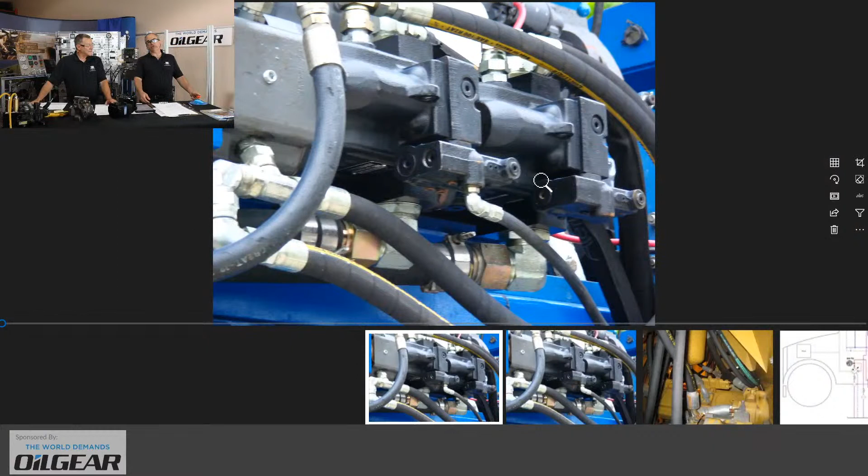As we usually do, as we're getting underway, we have a look at some photographs of common load sense machines, just so we can remind ourselves of what it looks like out there in the real world. So I'm just going to switch over to my photos here. And these are photos that Mark and I have collected over the years in our travels, just to sort of remind you a little bit of what load sense machinery might look like in a typical final build or installation.

And what you see there in the middle of the screen, if my cursor allows me to sort of follow along on a hose, hopefully you see that. You'll see that LS signal line coming back from some kind of flow proportioning valve, entering back in and connecting up with the pump controller on one of two pumps. The more outboard pump of two through-mounted pumps only has pressure compensated feature. But the one that's more closely coupled to the prime mover, that one has the load sense line coming in.

Let's switch over to our next one. Here's from a Caterpillar grader. You might recognize this one - it's one of two main piston pumps on this particular machine.

And there it is again, that load sense line. You can see it here just above the yellow controller on the pump. That load sense line is coming back from the main valve bank, taking information from the most heavily loaded cylinder or hydraulic motor on the machine and using that signal pressure to basically adjust the pump on the fly. It's really not too much more complicated than that. A load sense system, by some description, is still a pressure compensated pump, but it's constantly being readjusted based on how hard the work is at the hydraulic cylinder or the motor.

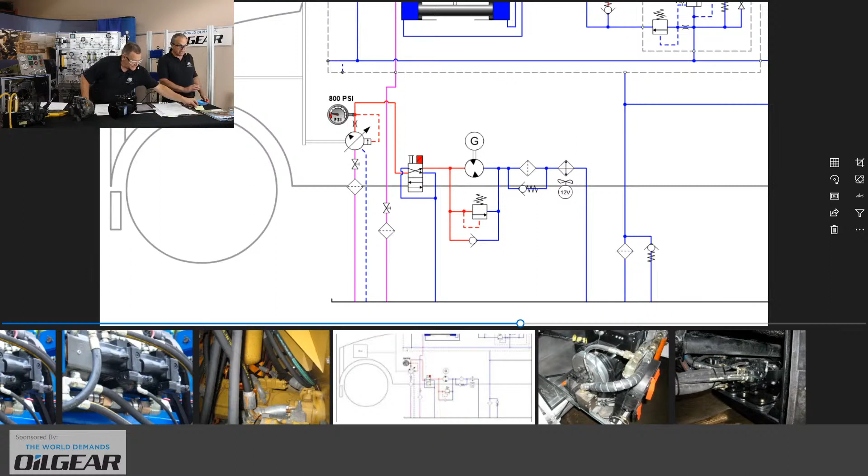In fact, in terms of keeping it simple, let's have a look at a super simple hydraulic system. This is the load sense hydraulic system for a generator set. Can you believe it? This particular pump that you see there just below the pressure gauge is a variable displacement pump, and it is sending flow through a 4-port 2-position hydraulic valve and off to a hydraulic motor that you see there just below the letter G. What's happening? Well, this hydraulic motor is powering a generator set.

And so one of the big advantages for working with a load sense system is not just about the energy savings - that's a big one. But another thing that a load sense system can do is very carefully regulate flow in the face of changing load pressures on that actuator. And so as that hydraulic motor is turning an electrical generator, it's coming under different amounts of load depending on what's been plugged into that generator.

And so here's a simple load sense system. And if you're looking at this schematic and wondering where's the load sense technology, well, it's all clustered near that pressure gauge. So as much as many load sense systems that you might be familiar with have a multi-section valve bank, like on a grader or an excavator, let's say, in this case, look just above the 12 o'clock outlet port position on that pump and notice that there's an orifice there.

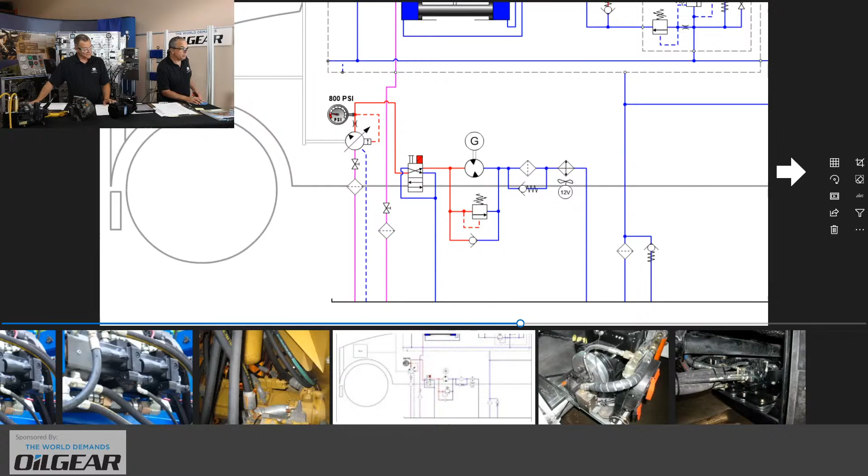It's all fairly compact. So let's see it on the actual machine. There we go. That's the generator, that aluminum disc, and the black structure that moves off into the upper right-hand corner of the screen. And then, for those of you who know your bent axis piston motors, there it is. It's turning that particular generator.

There's a bypass pressure relief valve there. There's an anti-cavitation check valve built into that beige colored valve block that's on the inlet of that motor.

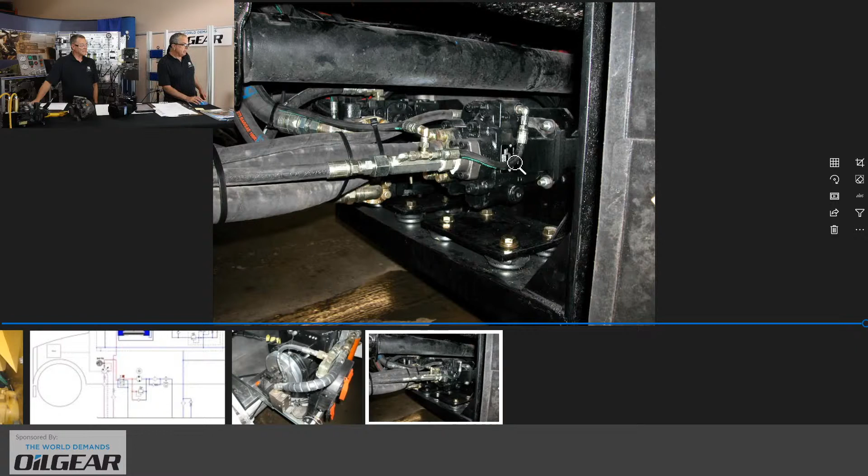But as we move back towards the pump for this system, the load sense capable piston pump, what you are seeing there, it's all kind of painted black, so it might be a little difficult to see some aspects of it, but flow is moving from the pump on the right out through that fixed orifice, not even a variable needle valve, just through a fixed orifice to set the flow rate and create that necessary pressure drop. Mark's going to have more to say about that.

And after passing through that fixed orifice, there's our load sense line. It's not even a foot long. It's not even 30 centimeters long. And back to the controller on the pump.

I think in our travels, Mark, this is probably the simplest plumbing we've seen. I haven't seen one simpler than that. For a load sense system, yeah.

And if you're wondering what that T-fitting is, where's that going? That's just going to that gauge that you saw on the schematic a moment ago. That's going up to a gauge on the operator's console. Here, I'll back up. So that gauge that you see the 800 pressure value for, it looks like it's just connected directly to that T-fitting, but it's actually on a hose that goes up to the operator's console.

So that is our brief look at load sense systems out there in the real world, just to remind us a little bit of what the applications actually look like.

Carl, also go back to the schematic for a second. Okay, let's do just to show a good example of the simplicity of this particular symbol.

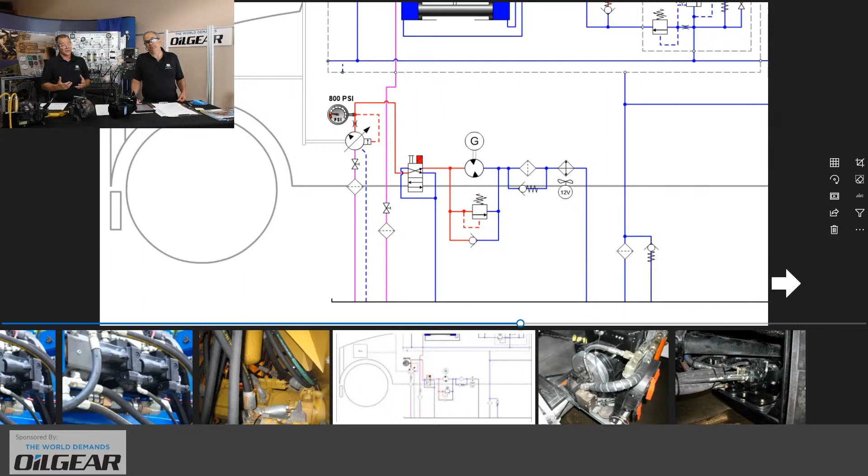Yeah, that's a good point to make, Mark, that pump symbol is overly simplified. We're going to get into a little more complex ones. The pump symbols are going to show up here in a moment as we get into our material, and we'll see that there's generally a few more elements involved with the drafting of that symbol if it's complete, as Mark has pointed out.

All right, let's switch over to lunchbox sessions, and let's dive into a simulation that will help us understand a bit more of the realities of how a load sense system is working. I hope that's showing up correctly for everybody's screen there. And this is one of our simulations where we've got a piston pump being featured in the middle. Maybe we'll zoom in as we move along here a little bit.

And then flow passes over to the right through a proportional valve spool. The assumption with the vast majority of load sense operated or load sense controlled hydraulic systems is that you're likely to change the speeds as you desire to hydraulic cylinders or motors. And in this case, instead of that fixed orifice, because the genset motor only needed to turn at one speed, that's been replaced with a fairly complex looking proportional valve spool.

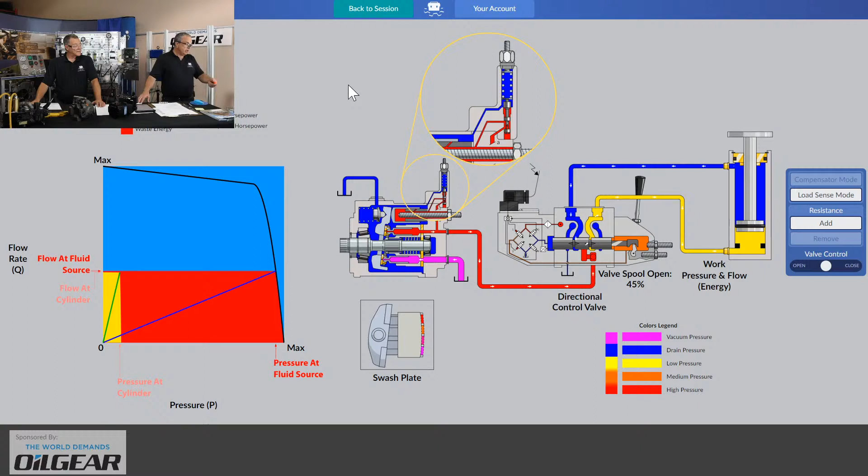And what you'll notice is that we don't yet have a load sense system. There is no feedback line present yet. We're basically working with just a pressure compensated pump at this moment.

Now on the graph over on the left, you'll see a couple of colors there. That yellow color area represents the pressure that's happening on the business end of this hydraulic system right now, and that's out at the cylinder. So our cylinder only needs a minimal amount of pressure right now to move. The cylinder is lightly loaded. That pressure value you'll see along the horizontal axis on the bottom where it says pressure at cylinder.

And the flow rate is also well below the maximum. The flow rate is somewhere below 50% of the flow. Well, if you have a look at that proportional valve spool, you'll see that it's set to 45% opening. So the valve spool is not even quite half open, and that's because the operator wants to control the speed of the cylinder.

So the amount of horsepower, the amount of total energy required to move that cylinder is that diagonal green line that looks at both the flow rate and the pressure. And so our horsepower line, the length of that green line, that diagonal, is representative of how much power it takes to operate the cylinder right now.

But what about the entire hydraulic system? The entire hydraulic system starts back at the prime mover and the pump. Well, that is the long, dark blue hypotenuse or diagonal line that you'll see there cutting across the screen. And that's letting us know what's happening at the fluid source, the piston pump.

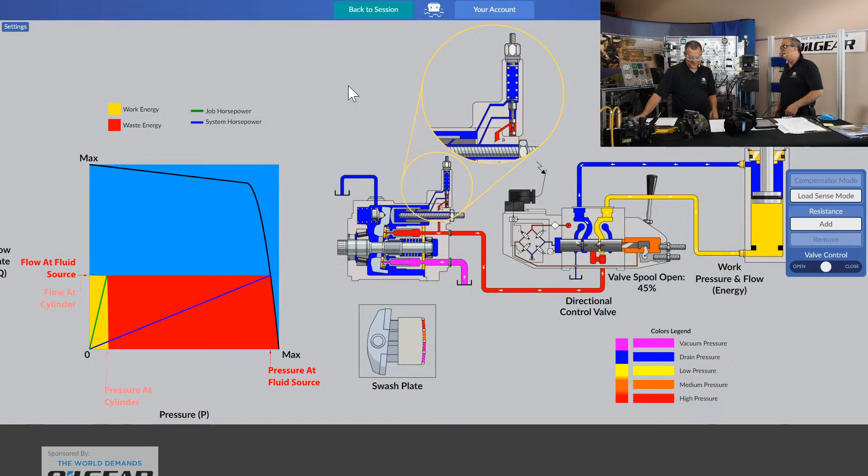And if you decide not to use all of its flow for the cylinder, then it's also at maximum pressure going where? Right over the relief valve. Going over that relief valve, and there's your heat.

So the pressure compensated pump is already an improvement, but we can do better. I'm going to click on the button for change to load sense mode. Have a look at what happens to the plumbing near the valve bank. As I click that button, you'll see an extra hose is going to show up. It's a small one. There it comes.

A small diameter yellow hose has been inserted between the valve and the pump controller. And that's our load sense signal hose, LS signal. And so that is information that is being fed from the work the cylinder is doing right back to the pump to help make the adjustment at the compensator on the fly.

We spoke about that. Now, it might be most convenient to take the load sense signal right from where the load is being carried. That's at the base of that cylinder. That's not convenient for plumbing. Not really. No. So it's typically done with a shuttle valve that is sitting there between the A and the B work port inside your typical load sense valve bank. Not an uncommon way to arrange that.

So in simple terms, what's happening here as we look at the energy graph back over on the left, what we see is that our pressure now is no longer at maximum. Like the pressure compensated pump, this pump is flow matching our requirements with a proportional valve that's only part way open, but also setting the maximum pressure on the fly in hopes of trimming back the total amount of power that this system needs when the cylinder is lightly loaded.

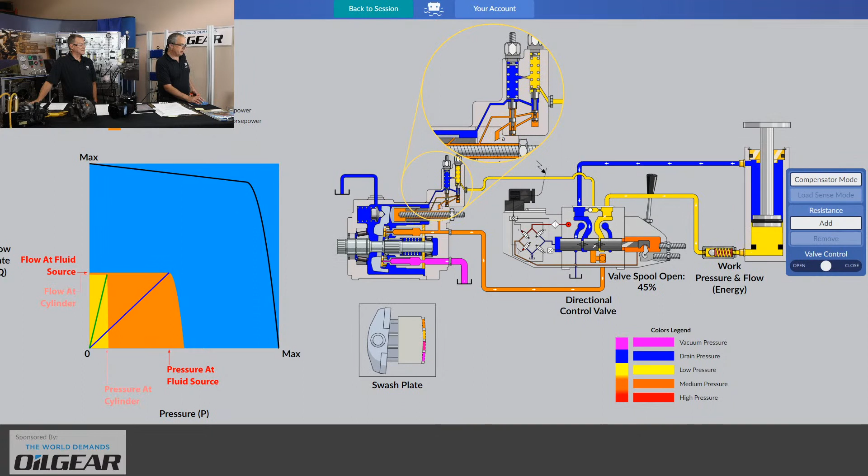What happens if the cylinder needs to work harder? I'm going to add a brick now. Just going to find my mouse icon here. And I'm going to add one brick. So one brick added to the cylinder, and our business end of the hydraulic system will be working harder.

Well, that means a higher load pressure will also be transmitted to the pump through the LS signal line and will give a boost to a spring that is usually set pretty light.

So that spring is lightly set, but it takes a booster value from the load sense signal line coming back from the loaded cylinder via that shuttle valve that's commonly located in a load sense valve bank.

So I hope that gives you a little bit of a picture. We could spend more time there. That gets pretty technical, but at least it gives you an idea of the energy savings that are possible, because the idea is not to have the entire system consuming far more energy than what is needed to work with the hydraulic cylinder or motor at any one time.

Oh yes, I should probably point out that the difference between the pressure at the cylinder and the pressure leaving our pump, the fluid source, is more commonly referred to as the margin pressure or the differential. Maybe we have ours set a little bit wider than 300 on this graph. Hard to say. It's just a relative graph.

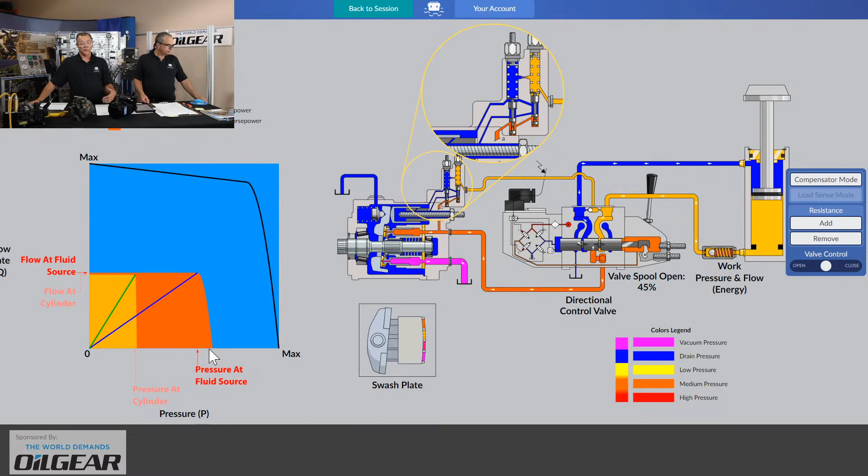You can't hurt it, I often tell people. But when I'm initially teaching load sense to a group who's just entering into the field, I just tell them to focus around the amount of energy that's being used. That's our key thing right now.

Thank you, Mark. We'll show that.

Absolutely. As Mark mentioned earlier, the symbol on a schematic drawing for a load sense pump is usually quite a bit more complex than the one you saw on the genset hydraulic system. And here on the screen, you're seeing a cutaway of a load sense pump with its two controllers. The one in blue up in that magnifying glass, that would be our pressure compensator, our pressure cutoff, and the one on the right, the load sensing, sometimes referred to as a flow compensator.

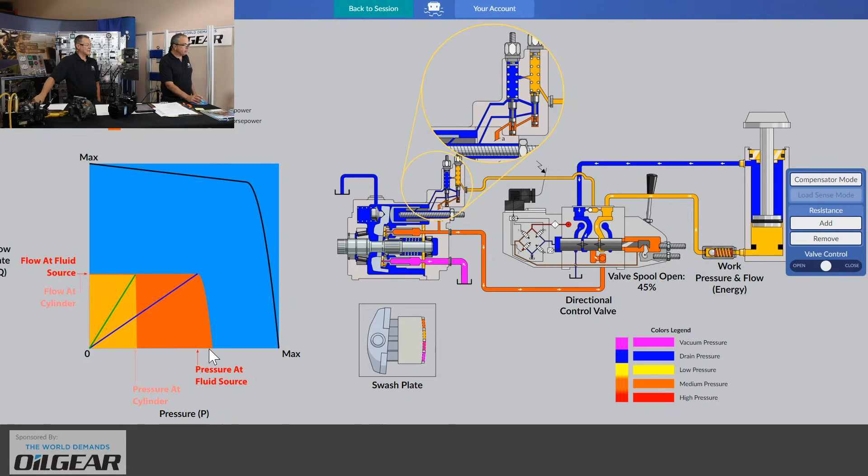Now we're going to switch over and look at a very typical schematic symbol for a load sensing pump. That symbol can look intimidating on a schematic diagram, but what you're seeing is just a depiction of a pump with two pressure controls built in. We're assuming you already know about piston pumps and the control piston and the bias piston, and how that works for changing the swash plate angle.

There's the pressure compensator, set at 1500 psi. We have a load sense setting, which right now is at 150. I'm just going to move it all the way to 300.

Looking at the symbol for the needle valve on the outlet of the pump, that doesn't come with the pump, but a lot of pump manufacturers will remind you that you're going to have to choose some kind of flow proportioning device to create that pressure differential. That's so important, you have to choose that. We've got a simple needle valve here, but on our live schematic it says it's usually a proportional directional control valve that would be sitting there.

If you look at the two pressure gauges and the numbers there, the pump outlet gauge is the lower of the two, and then the system gauge. We don't know what's happening out the top of this schematic, up on the system with cylinders, hydraulic motors, things that are doing work. But what we do see is that across our needle valve, the differential is being maintained at 300. There are little fluctuations on the gauges, but that differential is maintained using the feedback information on that horizontal yellow line you see there.

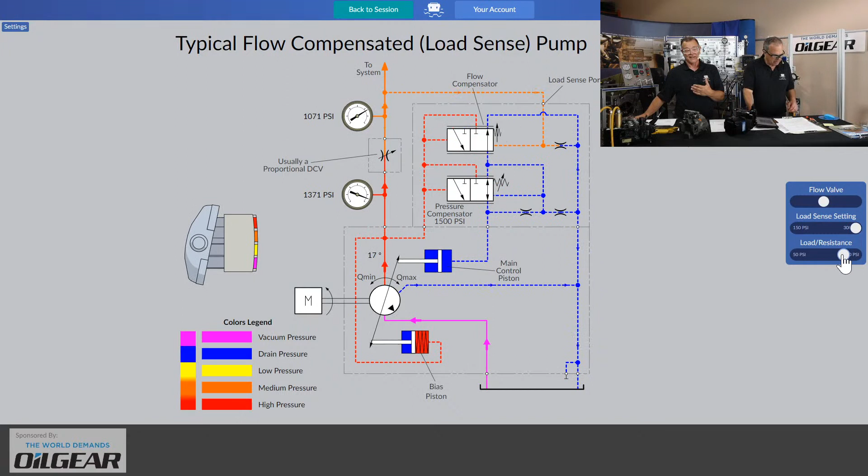Going back to one of the things I've found over the years of training people, it's to keep it as simple as you possibly can, which works really well in my world. Carl, on the other hand, gets into the complexity, so I just tag along and learn from him. But on this one, we learn together.

What we've always said about load sense is it's very similar to cruise control on your car. If you think about it simplistically, you just want to set a speed and go along. If you hit a hill, your engine will get more fuel, more power. But if you're coming down the hill, it'll back off and return to a standard setting. So keep that in mind, no matter how complex the system gets - we're sensing the load.

Really just sensing a load and telling the pump what to do.

We're going to show that as we move along here. We'll bump into some terminology like standby pressure, differential pressure, margin pressure, and hopefully we don't tangle that up for you. We're going to try to keep that as simple as we possibly can. We'll also answer some questions in a few moments that you guys have been sending in, so keep firing those in and we'll get that all queued up.

Maybe just before we get to that first round of questions, let's have a look at one more simulation here. Maybe that's a little simpler. We've gotten away from some of those great complexities of the hydraulic system and gone back to just showing a basic needle valve, in cutaway form, not quite so many symbols here.

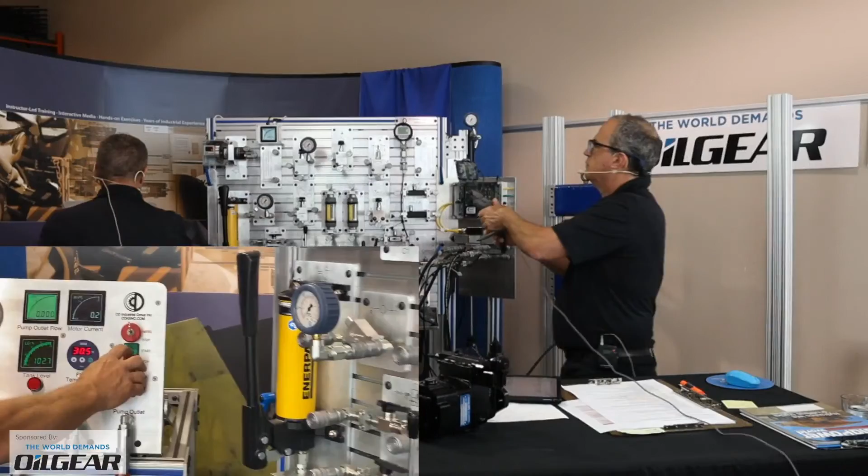So what I'm going to do is start up here. We've got this set up, I've got my pump set up. One of the first things I tell people: always set your flow first. Flow rates can change pressure readings, so it's a good idea to just get your flow rate set up. So I'm going to start this system, and you'll see I have this left in an open position, or closed.

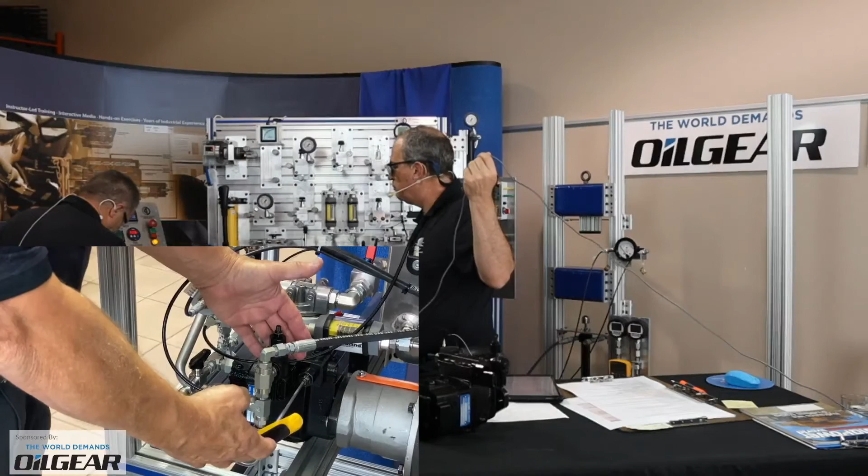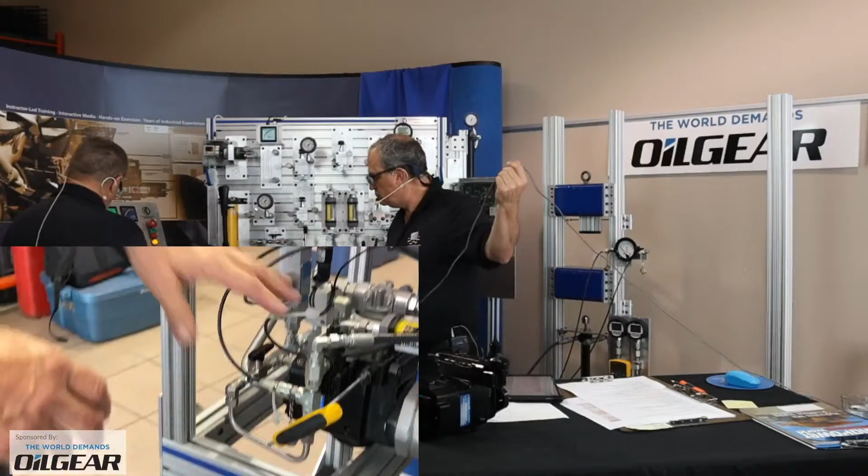This pump has a maximum volume stop control, controlled by this Allen wrench at this end on this particular Oilgear pump. Very common to see. That allows me to adjust the angle of my swash plate. I'm not going to play with that today. You can see I've got it set, and of course oil temperature and digital readouts can get kind of finicky. As we teach with analog gauges, people aren't as fussy. You give them a digital gauge, and they'll spend all day trying to make that hit 1 gallon a minute.

As you can see, there are some fluctuations. So we've got our volume set for 1 gallon. Now we've got to set our maximum pressure compensator. Our maximum pressure compensator is the system pressure that has to happen at maximum capacity the system is capable of producing. To do that, I must set this pump in a blocked position. I need to block the flow to create the resistance that I want to set.

So in doing that, my replication of the schematic, here's my needle valve referred to in this drawing as NV2. I'm going to reach in here and adjust this down to create resistance. Let me try, Carl, I'll go on this side. You can watch the pressure going up and up and up. At this point I'm going to see a maximum system pressure. I have preset this before we started today at 1200.

So I've got my 1 gallon, I know my pump can do 1 gallon, I know it can do 1200 PSI. So I'm going to back this off, get the pump into a wide open flow condition again, and shut it off. Now the reason I'm shutting it off is because I have not connected my load sense line yet. This was with my load sense line disconnected.

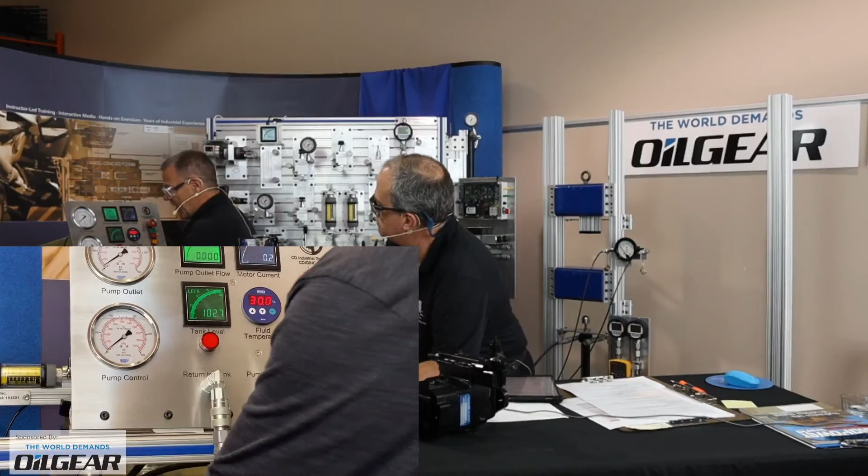So I have to change that situation, hook up my load sense line, which is the hose that we're showing today is going to have the orange cable on it, as opposed to the red, which is always going to be our maximum pressure line.

So I have a situation here. I already know my pump's set for 1 gallon, and I know my compensator is set for 1200. To set this last setting, when we start this up, notice where the pressure is, and I'm going to close off that particular flow control, the NV2, deadhead it, and now I see I've got a pressure up here.

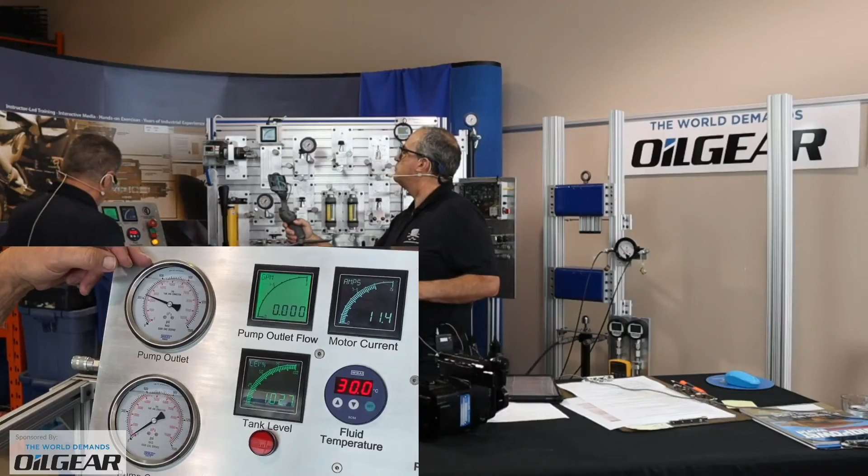On the system pressure now it's maximum, where before it was 1200, now we're down over 300. So I'm going to adjust this on the pump itself. Now this particular pump, you have to learn which are your controls, what makes things change, best to do ahead of time than to just guess at it.

If I were to screw this in, you can see my pressure is going up. Consequently, if I screwed this all the way in, it would go right up to the 1200, but that's not what we want to do. We might as well just put a pressure comp pump on this.

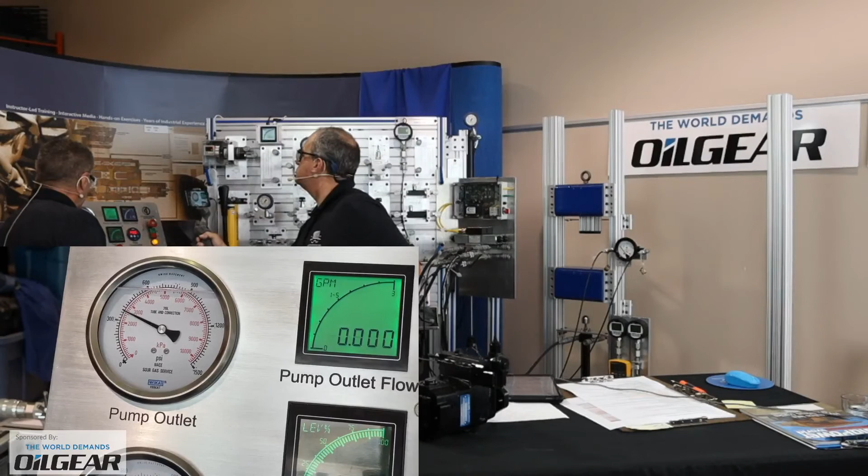So I'm going to back it down till I get near that 300, right, which is going to be close. Now, this is where it's going to be kind of crazy, and we're trying to keep it simple, so we're not going to get too detailed here about where we're picking up the signal from. I'm just saying that's where you make your adjustment.

There's my margin set. So my standby pressure, as we like to call it, is now set. No matter what happens, if I block this flow, I can only ever get the margin pressure setting.

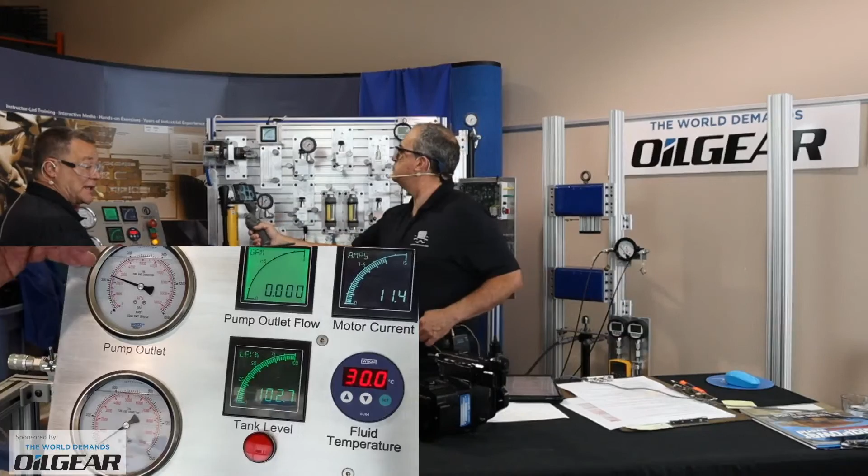What happened in the past, we had a service call where a company could not get maximum pressure with a brand new pump. Never said anything about it being load sense. And when I got there, that's the first thing I noticed. We set it all up this way, boom, showed him that he had the maximum pressure he had. He just had it hooked up and he didn't understand it.

So what we're doing now is we're saying that in this situation, if I open this valve up now, the gauge itself, notice where my load sense line is picking up here. This is the other end of the orange hose. It's on the T right out of what we're calling the NV2, the adjustable pressure or proportional control.

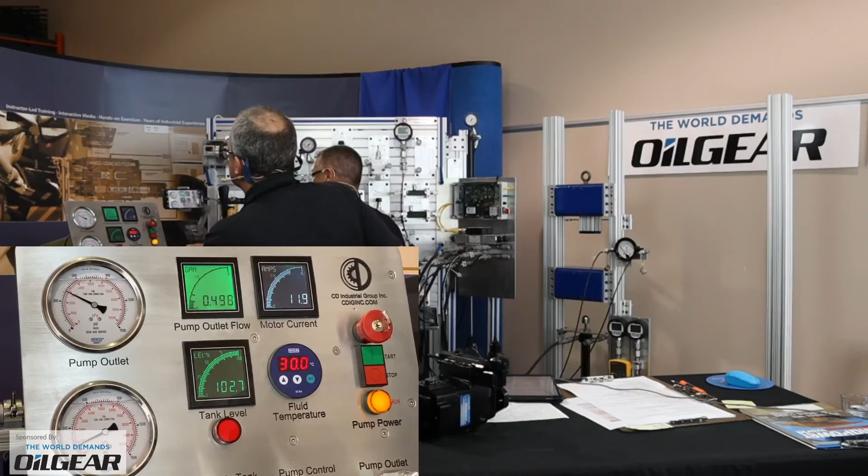And its worst case scenario, when you have no differential, when it's completely closed, you're just going to get your pump setting. So in opening this up, Mark... can I just jump in for a sec? So with the valve closed off, cutting off the flow there on the needle valves...

Okay, and so with that cut off, our pump outlet is back to what many would now refer to as the standby pressure. What's the lowest pressure this pump will put out when the LS line is at 0 pressure, and basically the operator is not attempting to operate any valves, move any cylinders or motors.

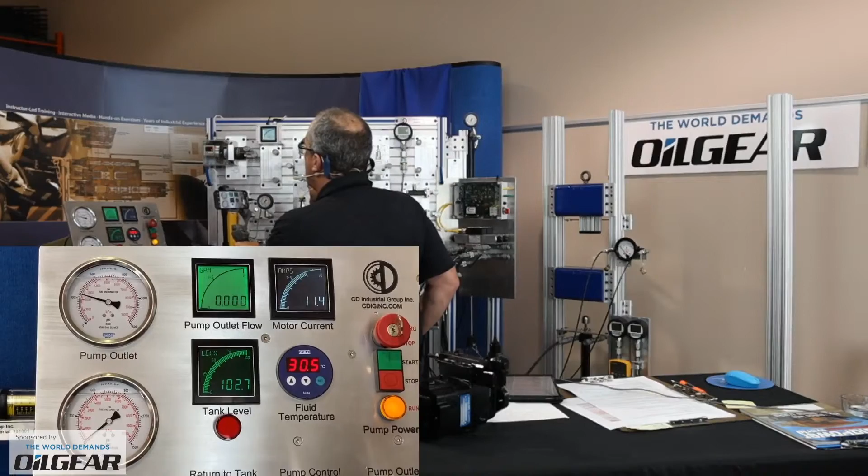This too also shows the energy savings. If I'd have disconnected that line and showed you when I was setting the 1200 at full flow, I would have been into a pressure or a power range. It's up around 15, 16 amps draw on our electric motor. So this is definitely an energy saving condition right here. You're not doing nothing, you don't need much.

It just stands there. Real critical to understand your controller ranges. One of the things I've seen people try is to set that down lower. This particular pump has a minimum range, I believe, of 300 psi. So we're at the very bottom range. You try and get 250, it's never going to happen. You have to get a different control spring in order to make that kind of a range happen.

So what we're going to do now is set that so we get some flow going. We're going to raise the pressure. I'm going to try and raise it maybe to, let's say, 500 pounds. Okay, I'm going to get this up. So now you're seeing my differential between what I set the standby pressure at, which now here we're showing 200, and now we're at 500.

So there's that 300 gap that we were looking for. Mark is just using NV2, a second needle valve, as a highly simplified loaded application, which could be like the genset. Exactly, I just got a fixed orifice here now. I just happen to set it where I want some numbers to show up good on the gauges. In this case, my NV2 is the load.

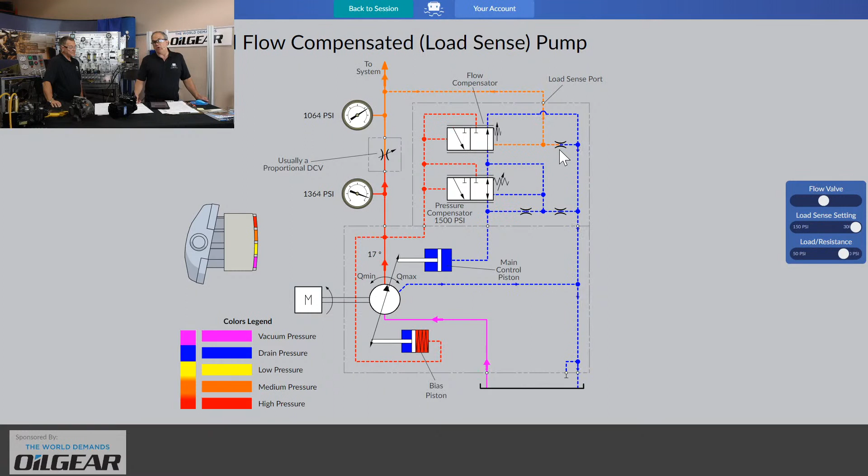Yeah, there's a bunch of things going on here. Well, one of these orifices - the one I'm circling with my mouse pointer at the moment - is there to bleed down the load sense signal when the directional valves on the system are put in neutral. When you put your directional valves in neutral, you want your pump to idle down to that low standby pressure Mark was showing you, and so you want to get rid of any remaining load sense pressure in the line.

Sometimes that bleed down orifice is inside the load sense valve bank, and sometimes it's in the pump. The designers, the system engineers, will make sure it's somewhere - it's not always in the pump. Sometimes this orifice is crossed out with a big X to let us know it's been blocked off, and then you'd probably notice that your load sense bleed down is elsewhere. In fact, I'll show you that in a moment on another example for another system. So that's that one.

Mubarak Hussein asks why there are 2 orifices at the pressure compensator, and what happens when you remove them? Okay, so more questions about these particular control orifices.

Sure, well control orifices come into play for a number of reasons. They can be there to help dampen the action of a control piston so that it isn't overly reactive to every little pressure change that occurs in the system, and to slow down the action so that the pump isn't overly reactive. Okay, why does it twitch?

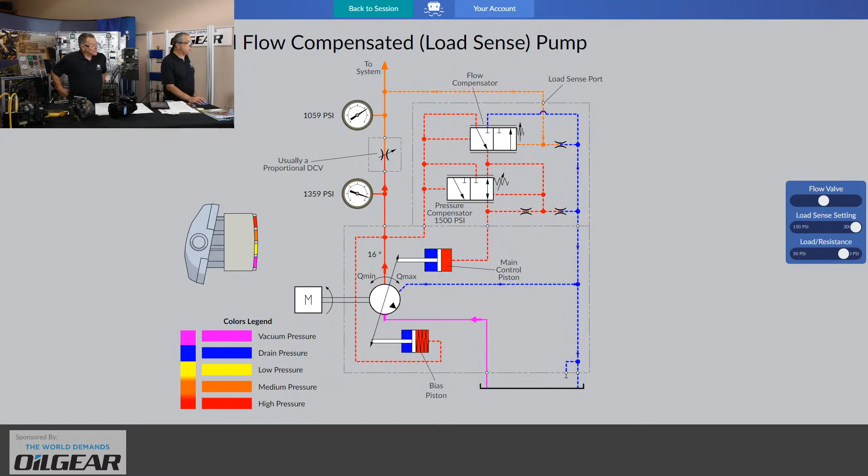Why 15 to 20 bar LS compensator pressure? Why not lower or higher? That's a really good, beautiful question. Let's go to this one.

If you're seeing the delta P and load changes simulation on the screen, then you're seeing one that I like. I'm going to remove a few bricks here, and now I'm going to do something in this simulation that I didn't plan to do, but I'm glad you reminded us, and we're going to drop a brick from the sky.

So here comes a shock. Watch those gauges, especially the gauge to the right of the flow controlling needle valve. Maybe watch the gauge on the left as well, but just watch and see whether or not that 300 delta P can be maintained as we drop a brick from the sky.

Oh, what happened there? I hope it played in real time for you, as it did for me in our simulation. When we dropped this next brick, that 900 turned into a massive spike of 1200, which for a moment was higher than the pressure controlled leaving the pump's outlet port.

Uh-oh, what happens? For a brief moment in time, until the pump responds and upstrokes and changes the position of the swash plate to punch that oil out at a little higher pressure, flow through that needle valve stalled. That translates into a cylinder that stopped moving.

Now, for the operator of the excavator or the crane, did they actually see that the cylinder stopped? No, it was a very short duration, but maybe now the operator calls in and says, I'm getting some really uneven motion, some very bad shocks to my machine at times. Well, this could be an indication that somebody set the margin pressure too low.

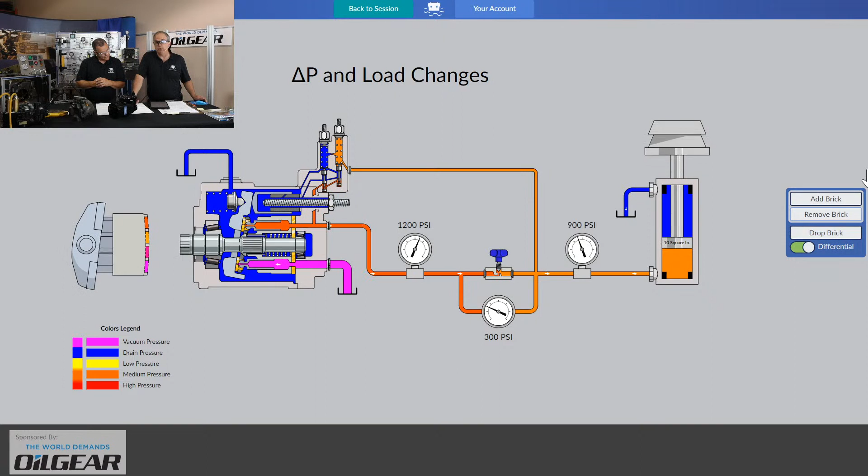A question came in from Kike: if a 4-port 3-position proportional valve is open P to A, flowing out to our cylinder, and there's a 300 psi pressure drop across the spool, does that mean there's also a 300 psi pressure drop on the oil returning across the spool B to T? No, not necessarily. The load sensing aspect of controlling an actuator while it's moving is done across the spool on the side where oil is being delivered to the actuator.

I hope that's adequate for now without overcomplicating things. You could get into areas like pre-compensation and post-compensation, and all kinds of terminology. For nothing else we say today, there's some new words that come into your language when you start playing with a load sense system. I spend a lot of time trying to understand what each manufacturer is talking about, but once I break it down into a simple function, I realize Parker calls it different than Rexroth, different than Eaton or Oilgear. Everybody has their own name for what they're trying to describe, but if you back up, they're just talking about the difference between here and here. Terminology can really throw you off until you get used to it.

Mark, can you help with this question? Did Mark have the load sense adjustment at the maximum when he adjusted the pressure cutoff? No, you had the load sense line unplugged, right? Wait a minute - load sense adjustment at maximum when you adjusted the pressure cutoff - I have it disconnected totally. I vent it; that's actually my preference for setting compensator settings, which gives you the maximum system pressure. When I use the term tricking the pump, I have to get a signal or create a condition where the pump, instead of trying to get to 300 and then de-stroke, is actually trying to chase itself. This is the tricking, what I call tricking. What's happening is the pump is trying to reach that next pressure and just keeps going up.

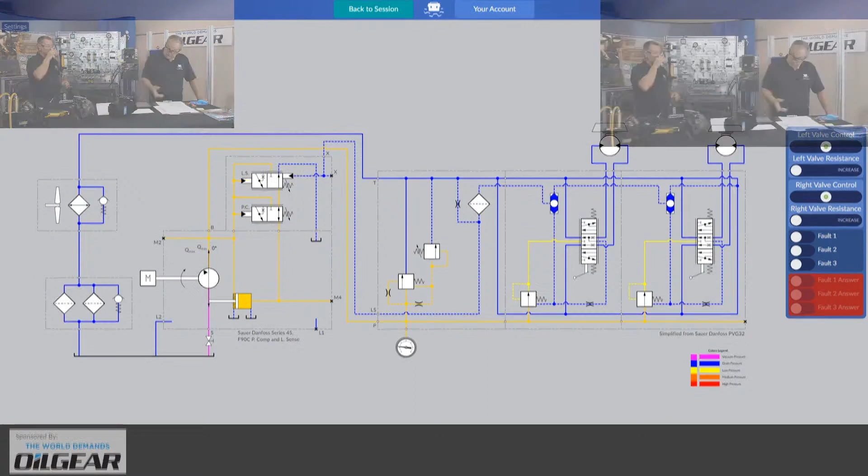But Carl's going to do a multi thing. Yeah, okay. Hopefully we answered some of your questions there. I love it, people are asking questions. And new viewers have joined us from Superior, Wisconsin. Hey, from the state of - lived in Kenosha for a while. Did you? Oh yeah, there you go. The state of cheese and beer and wonderful things. Bratwurst. Yeah, bratwurst. All right.

Let's go on and have a look at a multi-section simulation for a load sense system. Hopefully what you see now on screen is a pump on the left-hand side with some yellow lines, and over on the right you see a couple of hydraulic motors. And as you know, we like to put brick stackers.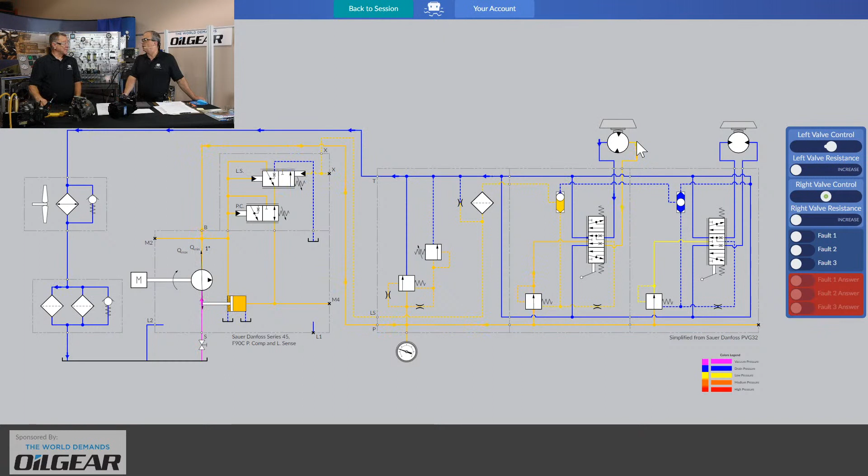We put a brick stacker on top of our cylinders so you have some way to easily imagine where increased pressure came from. We've done the same with these hydraulic motors, except they have a brake shoe, so picture that brake shoe there as a brake shoe brick stacker. I don't know how a brake shoe rubs against a hydraulic motor symbol, but that's the simulated world for you.

So we've got that proportional valve on the left side rolling. We've got that left motor running counterclockwise, only one brick on the stack. I'll increase that left valve resistance a little bit and put a second brick on that one.

And then on the right-hand valve, so now we're multifunctioning. Sammy's question, I think, had to do with multifunctioning, so hopefully I remember how to answer that.

Is this so the crane? The crane, the question, crane? Yeah, okay. These will be crane winches, Sammy. These will have to be crane winches.

On the right-hand side, we've got a motor running with only one brick on the brake shoe brick stacker, so lighter pressure. You can also see some differences with color, so hopefully that helps.

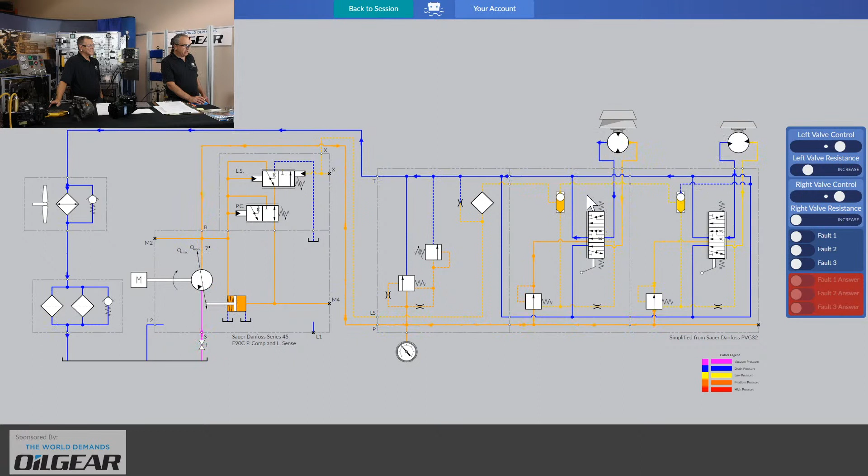You'll also see some valves that look like a shuttle valve. Nope, they don't look like a shuttle valve—they are a shuttle valve, with a little ball that can shuttle back and forth in there. I've been calling them that for years, shuttle valves. What else have we heard them called? Ball resolvers, yeah, there's a few other names, if you're Caterpillar oriented.

What I want you to do is watch those two shuttle valves, maybe primarily the one on the left. Watch the shuttle valve for the motor on the left as I overload the motor on the right. I'm going to really stack up—let me get on the resistance here. There we go, second brick. I'm going to add a third brick. I'll back off—there we go, second brick and third brick.

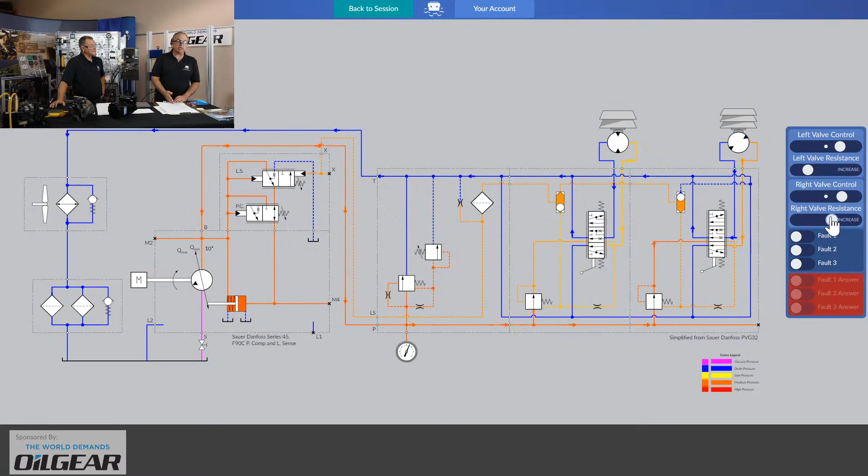Watch that shuttle valve on the left-hand side. It moves down when the motor on the right becomes the section of the valve bank that's at the higher pressure. This is a resolver network, as it's often called, and what these shuttle valves do is allow the valve section running the actuator with the highest current system pressure to report that pressure to the load sense port on the controller back over on the pump.

If you'll follow with me, we'll move back through the shuttle valve on the first section, then through a filter screen. There's that bleed down orifice, you guys. Instead of bleeding down inside the pump, this one bleeds down the LS line, the LS network line, when the valves are neutral—bleeds it down inside the valve bank and out on the LS line, and there's our signal hose reporting that to the pump.

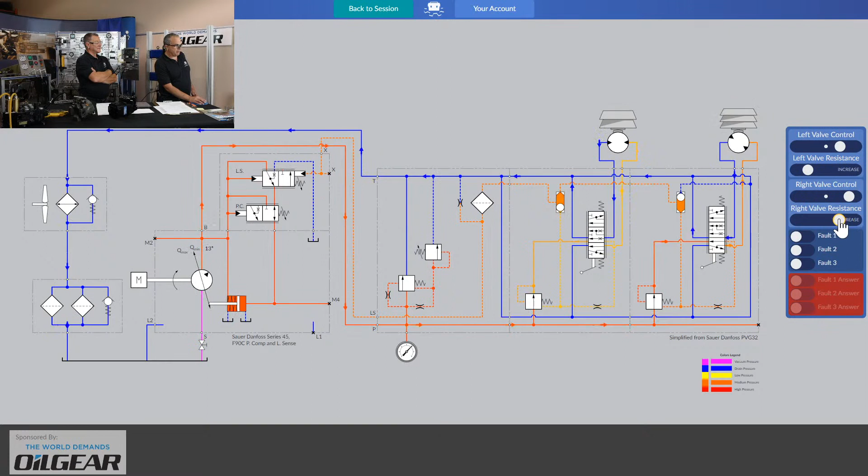Now, if the hydraulic motor and valving on the right are in charge of making the pump change its position a little, watch the swash plate on the pump on the left as I play with the resistance on the right-hand valve application. All of the instructions for what the pump should do are coming from the valve and motor application on the right in the valve bank.

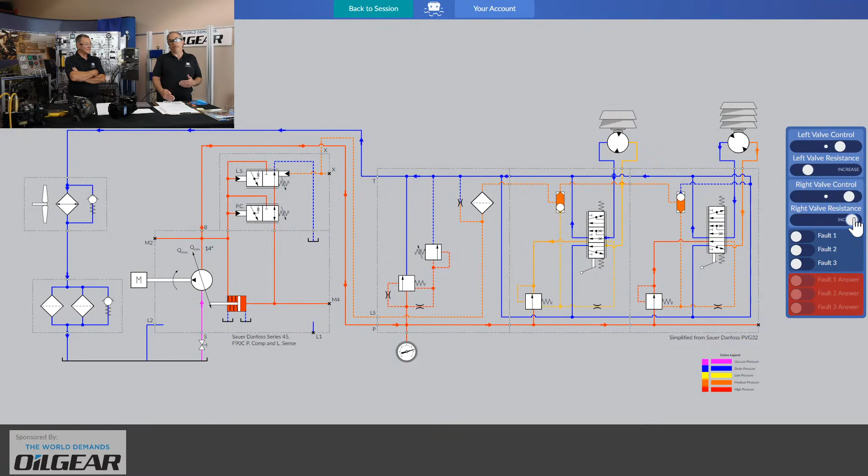Well, if the pump upstrokes a little bit, does that maybe mean the motor on the left might speed up because the load on the left motor didn't change? That would be undesirable—just because the pump was compensating for extra loading on the right-hand valve and motor application doesn't mean the left-hand motor should speed up.

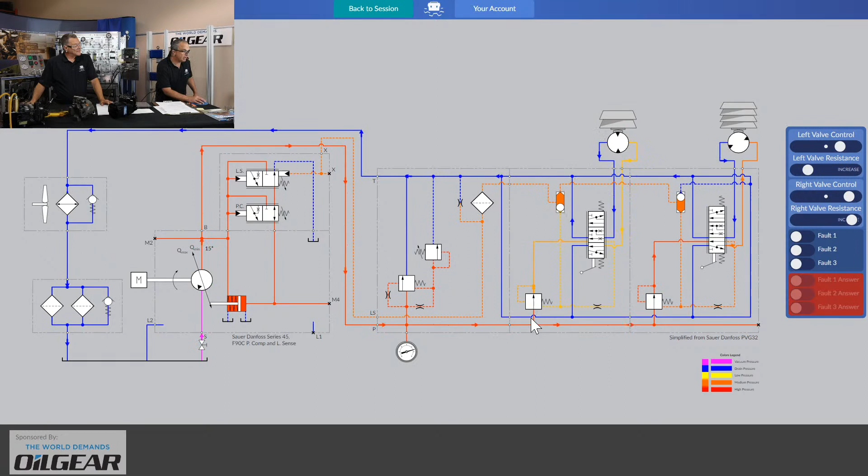Let's see if there's something that helps us with that. What's jittering down here at the bottom? That little box jittering near the inlet to the left-hand valve and motor application is receiving some of its information. I'm going to run these valves at full speed so our proportional ports all line up. That valve is receiving some of its load information through little holes drilled in the spool.

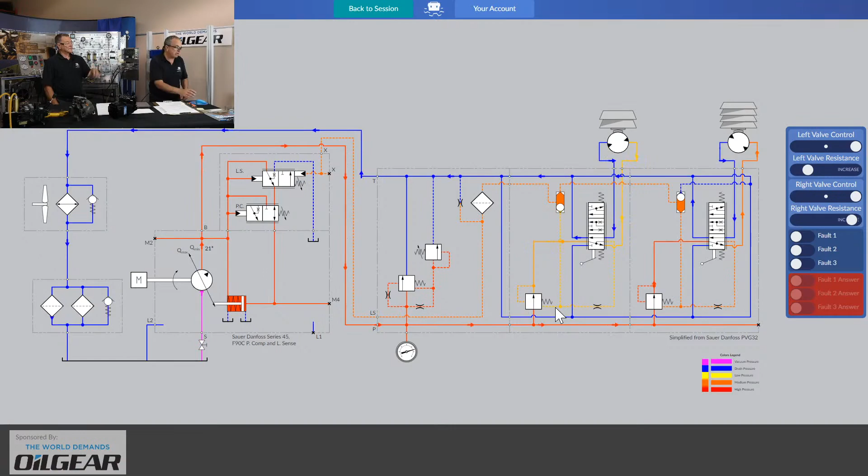Mark might show you something there. That dynamically sets a valve that maybe looks a little bit to you and I like a pressure reducing valve, except that its control signal is coming from the load side of the valve. You guys know what that is. I've been teasing you. You guys know exactly what that valve is. Thanks, Mark, for reminding me to zoom in. I'm old, I can't see it that far away. So let's zoom in. That jittering valve is the compensator, right?

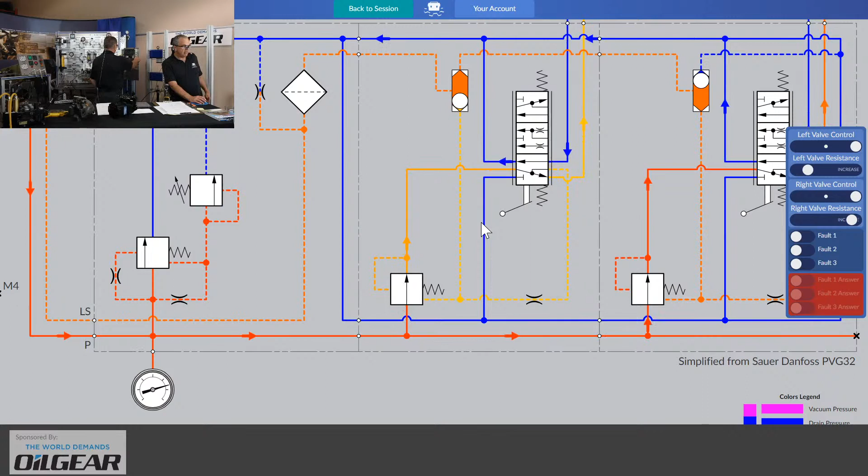That is the pressure compensator that precedes the inlet to the valve spool. So this is a pre-compensate example. It's making sure that even though the right-hand valve and motor application are talking to the pump right now at higher pressure, things don't get disturbed for flow rate across the valve spool on the left proportional valve and motor application in this multi-levered valve bank. So that is pre-spool pressure compensation, designed to keep things nice and accurate for flow passing through this left valve application. I hope I'm answering some of the questions that were being asked about that.

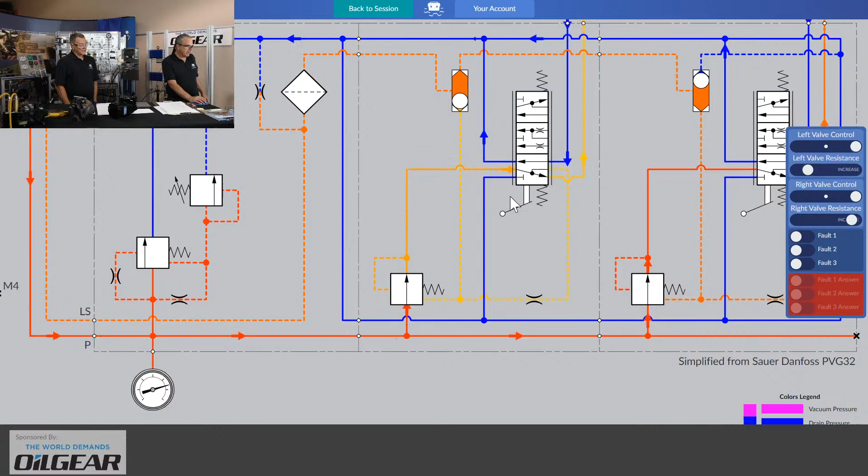I know somebody is going to ask, is there sometimes something called post-compensation? Post-spool compensation means that compensator would get moved from being before the P port on the spool to being on the A or B, both typically, work ports, leaving the valve going to the motor. That would be a post-compensation, post-spool compensation scenario.

Very popular on Komatsu machinery, shows up on some Caterpillar machinery, and quite often that post-spool compensation is there to really help make sure that flow is adequately proportioned to all the valve sections and actuators if all of a sudden many sections are open, many applications running simultaneously, and perhaps some of those applications are at a very low pressure, which might cause stalling for the higher pressure ones. In some of those cases, post-compensate can be the better one. Generally, for really accurate compensation, quite often pre-spool compensation is better at dealing with a great variety of pressure and loading variations. Different valve manufacturers often offer different approaches to that aspect of it.

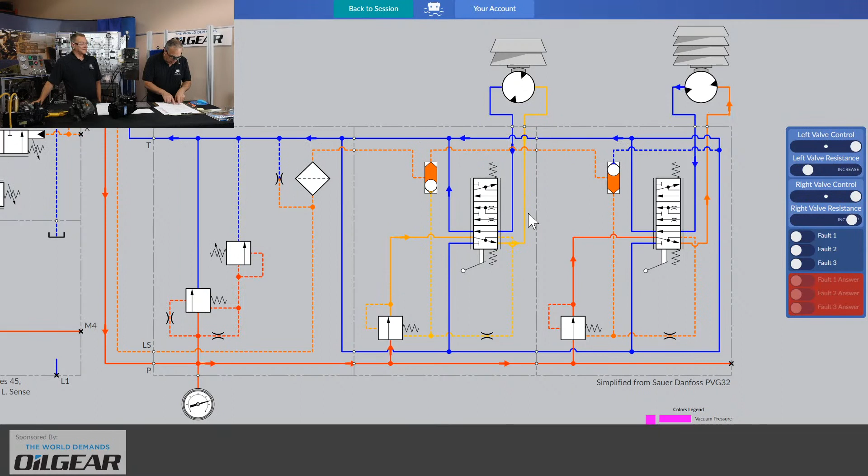Where are we in our list of topics, Mark? We better keep moving, eh?

Keep in mind what he talked about in the beginning about a pressure compensated flow control, how simple that functions. There's pressure on one side and then a lower pressure and a spring on the other side trying to position that spool to just the right place to give us the differential we're trying to create. This is very dynamic, and anything hangs that all up - dirt is your worst nightmare in these systems, because if that spool hangs up and the differential changes, the pump's going to see that and try to make an adjustment for that, and everything's going to go crazy on you.

Just to help make things simple once again, I have put up on screen here, not a load sense system, just a component. Hopefully you guys can see it. Mark will point it out. There we go, right here, the little machine, yeah, there it is.

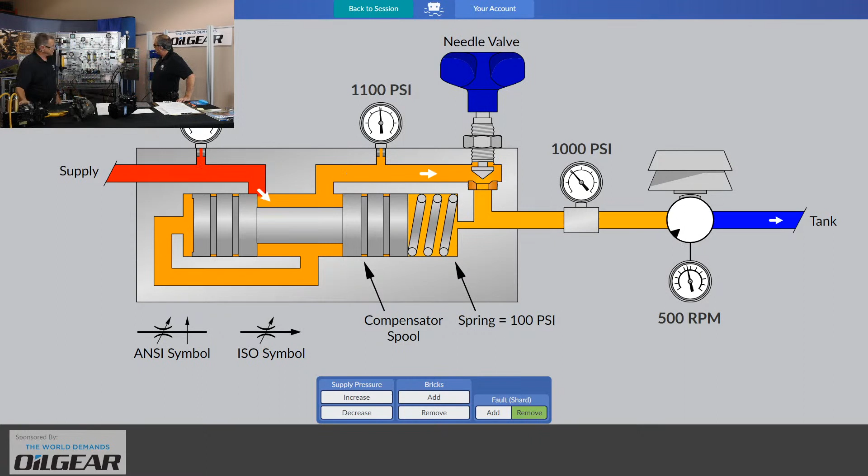This is from the Parker Color Flow series, and that is a pressure compensated flow control. Looks just like a plain old ordinary needle valve from the outside, but this particular model with the rounding that you end up with on the inlet port side lets us know that it's pressure compensated. So what you're looking at right now is a scenario where we're just controlling flow. This is just the pressure compensator, and you're thinking, did something happen? Did our proportional valve spool disappear? I guess you could say it did, but there is still a flow proportioning device - it's just a needle valve now.

So look what happens as we add bricks to the hydraulic motor brick stacker to induce a higher load pressure - there is a load sensing passage here, adds to the spring, and makes an adjustment on the inlet side to set up a higher pressure before the needle. What you will notice is that the pressure drop across the flow metering needle valve stays pretty close to 100 psi, whether we remove a brick or whether we add a brick. That's because there's that extra compensator spool inside this flow control.

So once you get inside a major pressure compensated capable load sensing valve bank, that's all that's happening. Let's not overcomplicate that. I think that's where we sort of pass off some of these features to Mark, because Mark and Nathan here were busy working on a new cutaway, and I'll let Mark take it away and show you some things about this one.

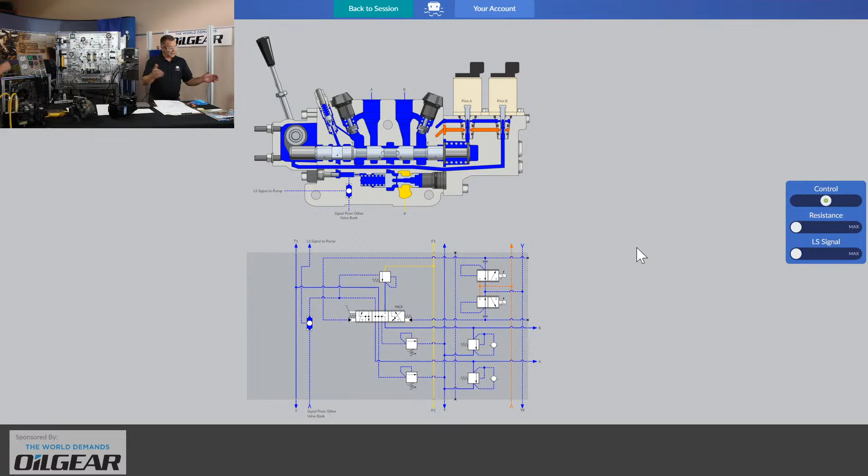From our experience working with people, mostly from myself as a visual learner rather than a book learner, I need to see some things. In these animations, we're looking at one section of this particular valve right here. I had it apart this week, and this is the one that's got the feed reducers on it. I'm going to run through this quickly to show you some spots. One of the things I've enjoyed developing here is bringing that gap that's missing between the mechanic or millwright into the hydraulic system.

So when we look at this part, I'll start by looking at the spool options. If I move my mouse nice and slow, as Carl teaches me sometimes, and mouse over that spool, you can see down in the schematic representation, that's the part we're talking about here. That's the representation in the schematic for that.

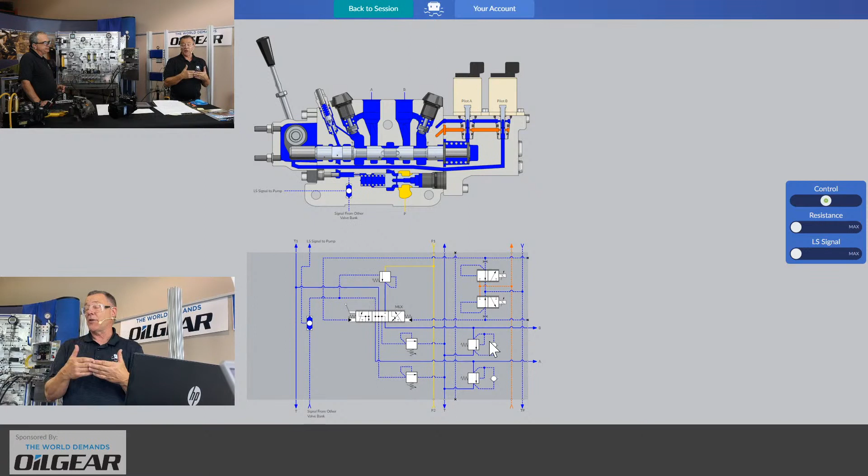If I mouse over that part and ask what this piece is doing, it tells me what part is visually in the break and cutaway image we have. So there's your main spool. Currently, we have a motor spool depicted here, which has all four ports open so things can coast to a stop. It can have many other variable configurations, as most of you are well aware.

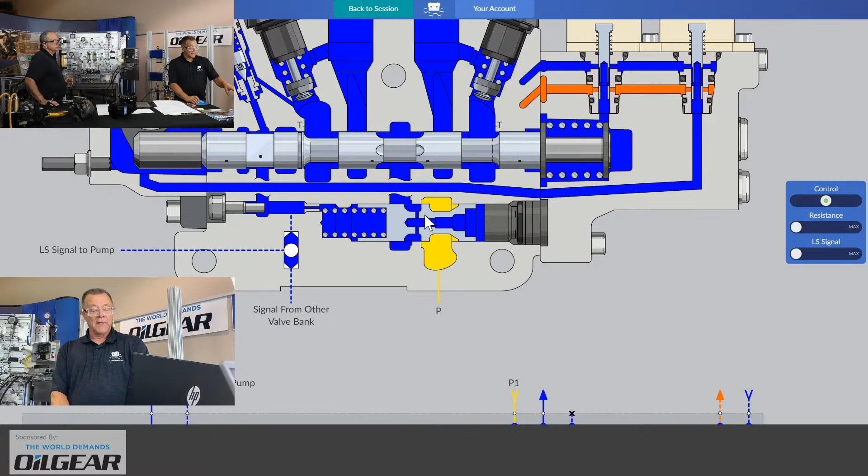As Carl just pointed out, I'll zoom in here for a minute and drop this down. Now when I put my mouse over this part, you should see the comparison between the control spool, compensator spool, and the spring, which is fed from pressure and forces inside and opposed by a signal coming from the shuttle valve onto this side, giving us that compensation function that says, give me just the right amount of flow to create the pressure drop I'm looking for.

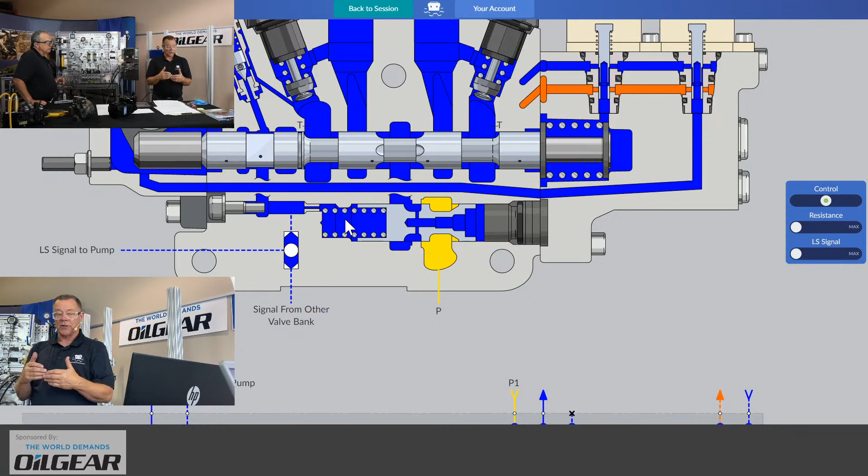In this particular spool, what's really unique and drove me nuts in the beginning was zooming in and realizing these little tiny holes drilled into the spools. There's passages in there, and I had to figure out where they were. Those holes are small enough that this little wire was the only thing that fit in there to help me figure out where it comes out once I blow air in. It's a fun thing to investigate.

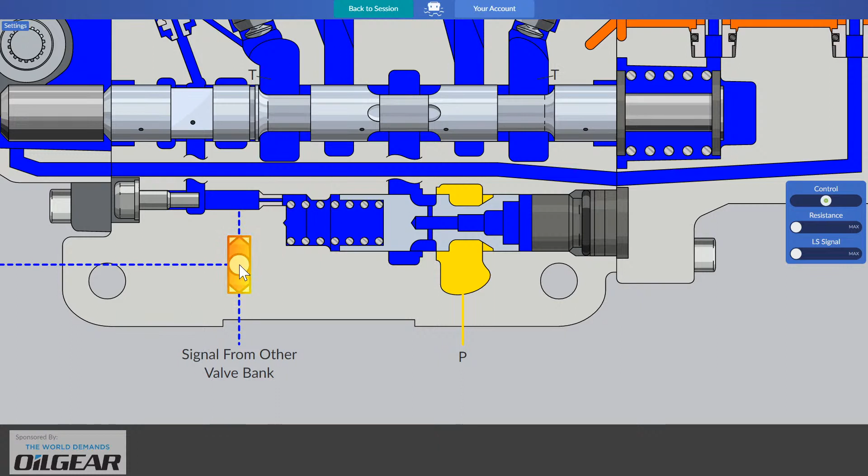There's our little shuttle valve we're talking about that'll move. I'll show you that in a second. But also look at the schematic representation. If I bring this down, when I put my valve... you didn't lose my ball, did you? Nope, hope not. Okay, good, stuck.

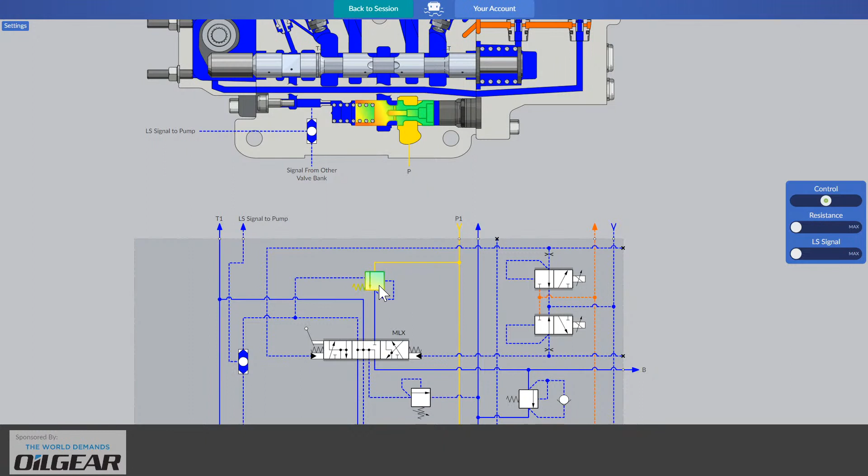A little tiny... yeah. So when we look at the spool, this is the symbol. Again, it's picking up a signal from the spool body itself on one side, and the main pressure coming in on the other. It looks like a normally closed pressure control, but it does give you that variability. In this particular valve, this also has a load check feature.

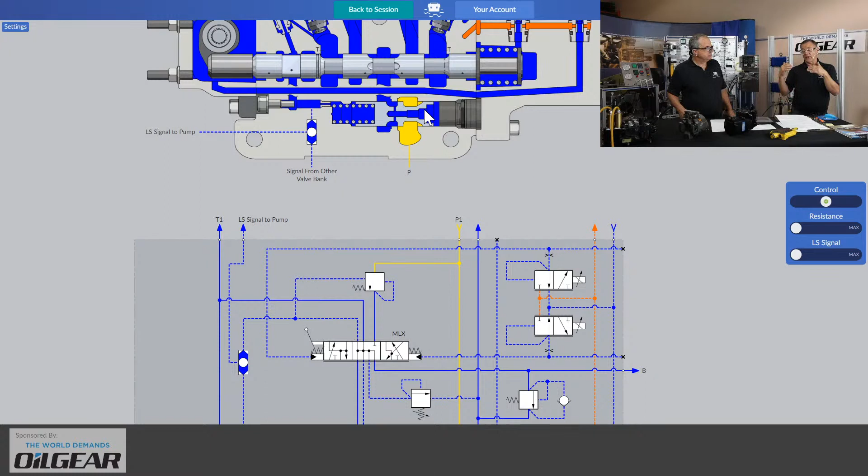When this valve saturates all the way to the back, and I'll make that move in a minute, you can have a situation where your load is held properly. If you needed to start an engine when it's under a load, this will allow you to not sense and have your load drop—so a load check function. I won't get into too much on that today.

Then we see these other little valves. I'll back out a little bit more so we can see where these are. These are your solenoid, proportional solenoid controls.

That sends pilot pressure to both sides of the spool to allow it to function. And we already talked about the resolver or the ball valve here.

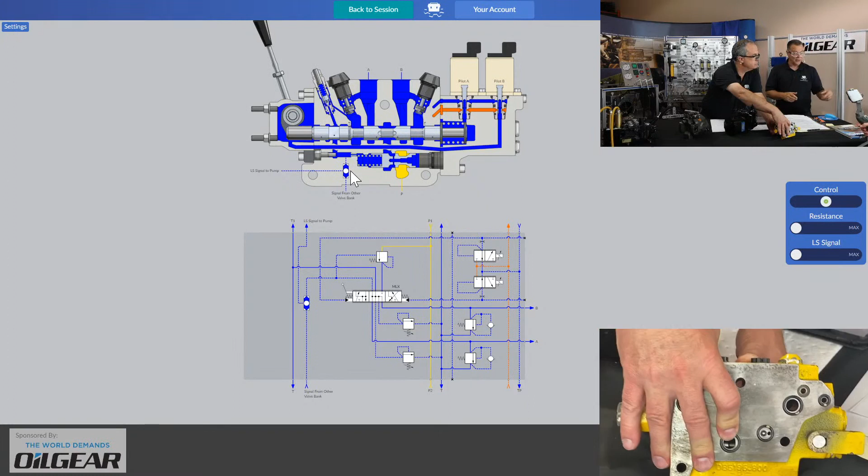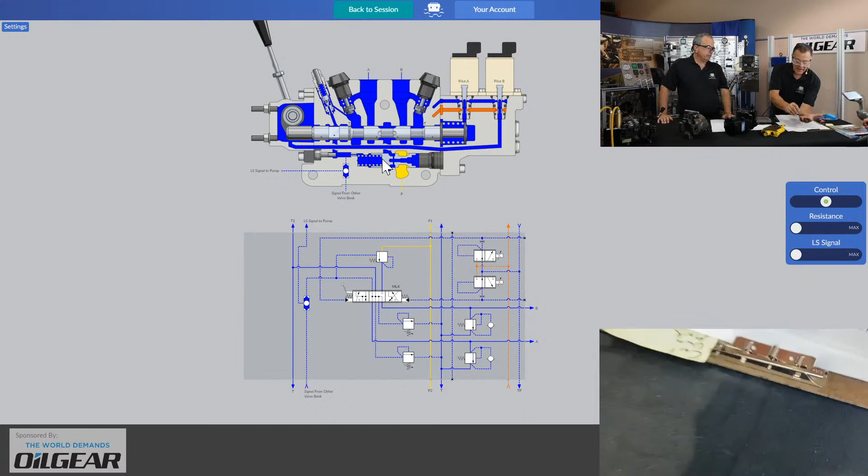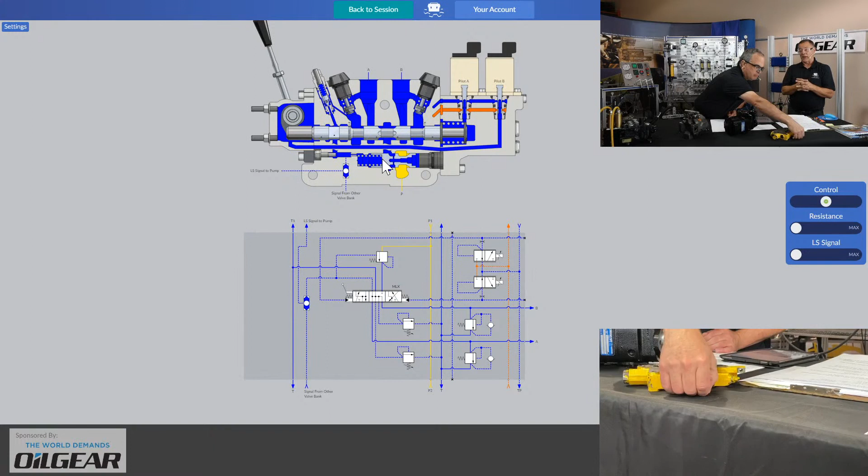I want to show you this one. This is a common problem for load sense. If you, for some reason, took your control valve apart and you're not aware of this little ball shown here in the check, if you tip that, you'll get that to come right out. It's a little tiny ball, 3/16 of an inch in diameter. I had a customer once who said, we took the valve apart, we can't get anything to work now. Not only did they mix their spools up, they'd lost half of the balls in an 8-bank control valve. When I asked him where all the balls were, the guy goes, what balls? So when those fall out, if you're a mechanic, go to your local bearing house and get yourself a bag of 3/16 balls rather than look for them, if that's the diameter. Mark, haven't you and I come across some that have a smaller diameter in some, eh?

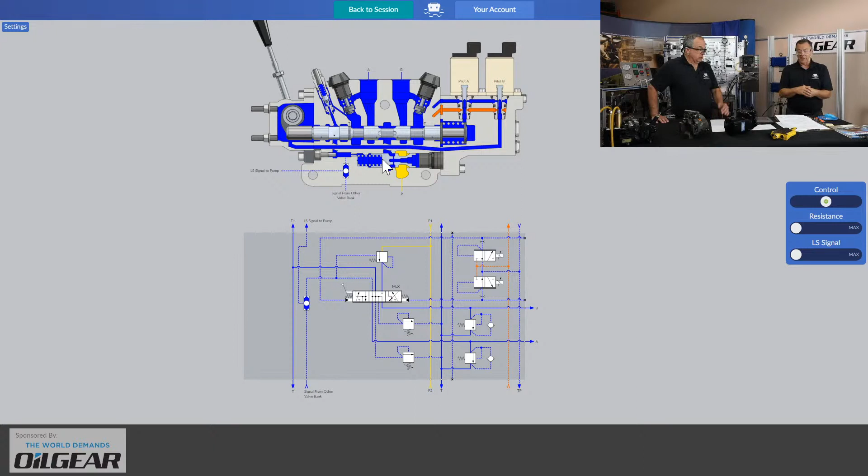Well, in some of the newer ones, yeah, now they make these in a little kind of cartridge that's pressed in. I know this Parker valve has that. You're not supposed to take it out, and the only way to get it out is to damage the valve, so hopefully it wouldn't even fall out. You wouldn't in some of them. But no, that's good. This is one that I've really had a lot of issues with over the years.

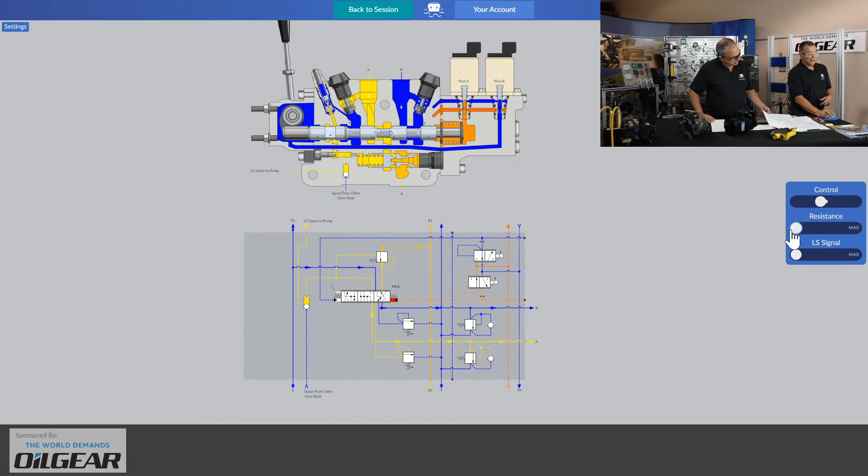So when we move this valve, we have our control feature here where we can shift this back and forth. The arrows show you the flow in all the applications. We can create the resistance, and we can put a load on the cylinder as well as change the pressure that the load sense signal is seeing. So you're going to see movement of various things when you play with this. I won't spend too much time on this today, this is going to end up being a whole other lesson in itself.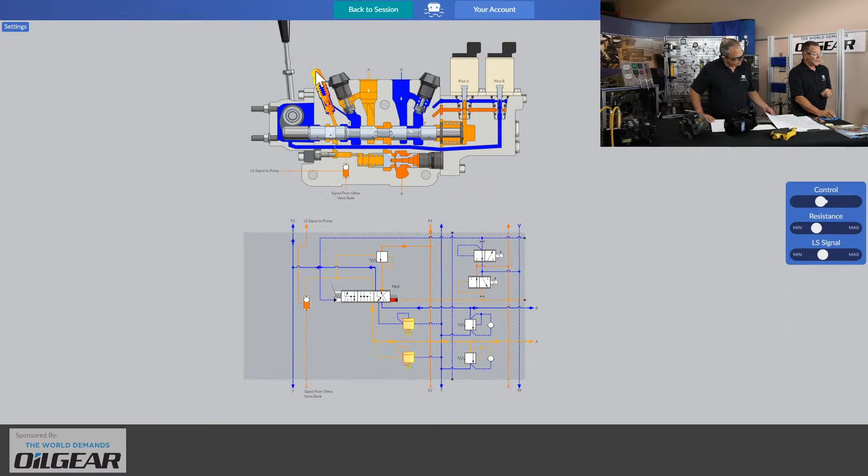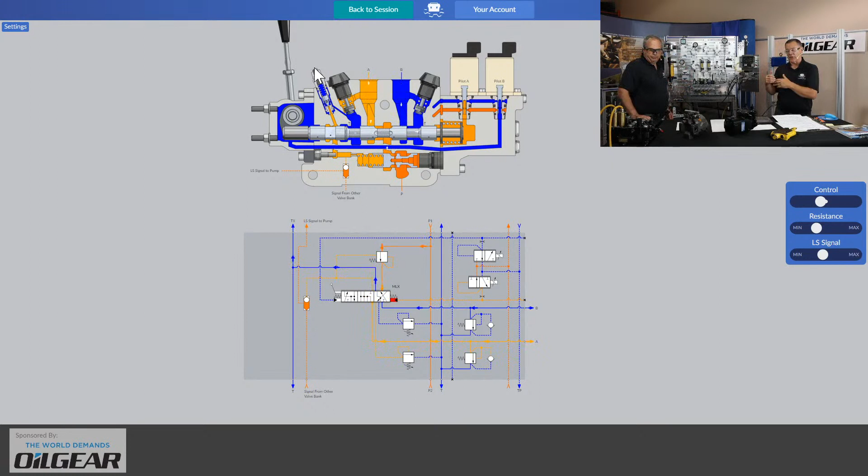But when we look over here, this is a very interesting feature. These are your feed reducers, they call them. And what they do, as far as I can tell right now, is end up being a pressure-reducing valve. This valve has two of them, one for the A port, one for the B port. This is not a port relief valve. This is a way of limiting the pressure in A or B or both to a preset limit so that you can keep main high pressure in the rest of the circuit, running everything else. So it looks very simple.

If you zoom in on that - I'm used to using my other machine - if you look at these, they kind of look like a relief valve. You can study it further, but it picks up a signal in the port. These are your work ports, or port reliefs, I should say. When we move these, they are again a cartridge made by the manufacturer, set at a given pressure. You have to make sure you don't mix those up, because these are set at two different pressures on this valve, as well as my feed reducers being set at two different pressures. If you put them back together wrong, you're going to have all kinds of problems as well.

So this valve is, again, the later technology. It's pre-compensated, as we talked about. Each spool has its own compensator. The inlet and outlet features of this valve have multiple options. It's amazing the complexity - all the manufacturers of this series type of valve, you're seeing an immense amount of options available, and you cannot mix them up. You do need to know what you're playing with. Okay, great, that's all I'm going to say about it.

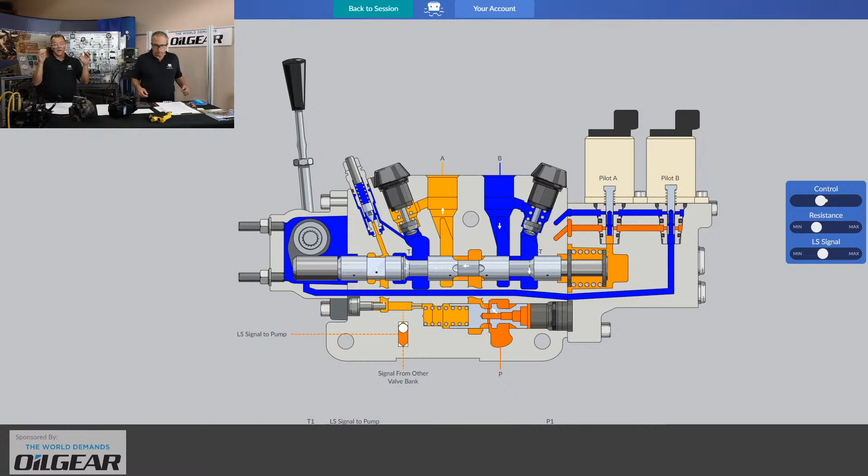Okay, thanks Mark, that's terrific. So you've had a look inside a typical load sense valve bank. The inlet - Carl was talking about how you can have multiple functions up to the maximum volume of the pump. But if you have a 5th or 6th function that you pull and need more, and it's a lower pressure, you can get into what's referred to as anti-saturation. You need special controllers for that, which have to do with pressure compensators. And we're just going to leave it at that today.

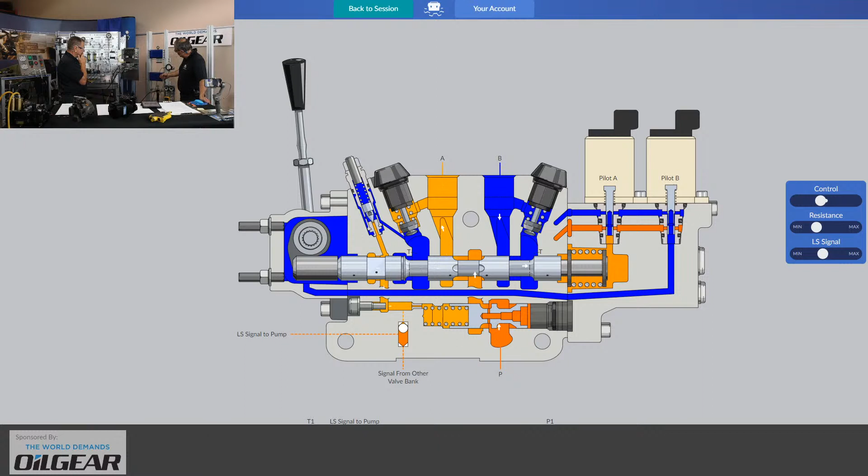All right, so we're getting close to the moment you've all been waiting for, where we're going to run a vertical cylinder application, a single rod cylinder. We're going to run it unloaded for a moment. It's going to lift, and then it's going to come into contact with the first 100-pound steel block. It's going to pick that one up, and then a short while later it will pick up the second block, adding a load. So we've got a live brick stacker planned for you here, and hopefully that's going to help answer some of the remaining questions that we've got.

Unfortunately, we probably won't have time for too many more questions today, we've been running long. But you can always email them. If you don't get the answer to your questions today, feel free to email us and we will try to catch up with you, and perhaps we'll answer a few more questions here as we run our last application. Now, some of you asked questions about jittering of pressures and what have you.

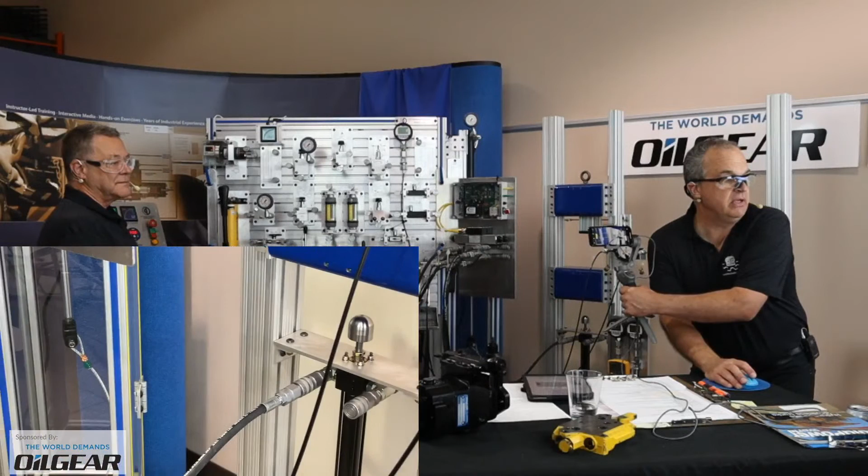As the system runs, I just want to explain a little bit here. Maybe I should have played the 3D movie of our load sensing lab setup, just to give you viewers a clear sense of what's going to happen. I'm going to run this video, and you can see the cylinder heading up, making contact with our first brick.

There you saw a little shock because it's steel on steel. The second one shows a little shock too, but when we run our system, you might see that because of our rubber cushion, that second shock on our delta P gauge might not even happen because we managed to cushion it. I'm going to run that again for your benefit.

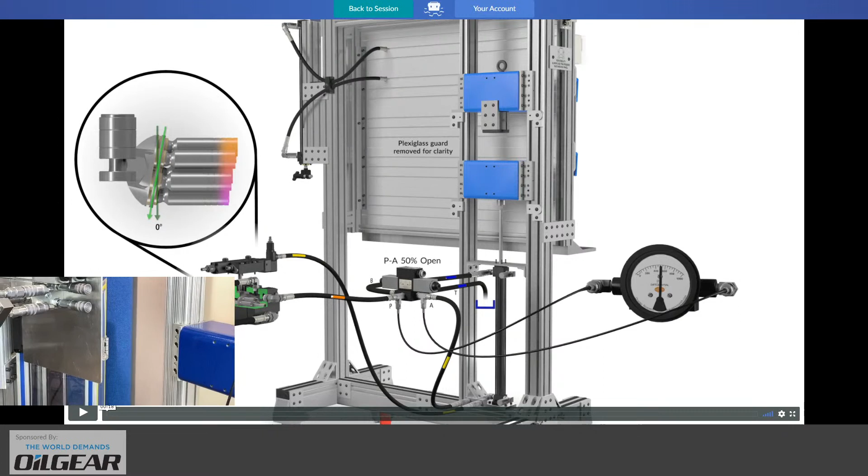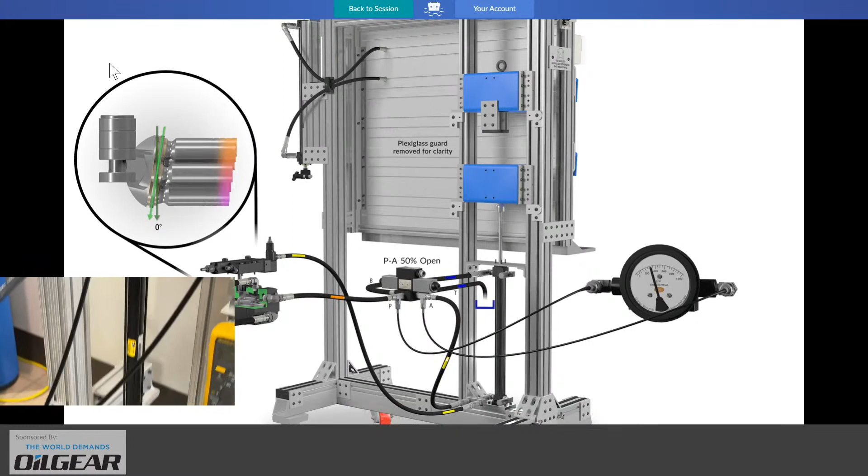Let's run that one more time. Watch the delta P gauge. The load sense line, in our case, is coming right off the base of the cylinder in the orange banded hose. That's the load sense. So we're sensing the load right at the cylinder.

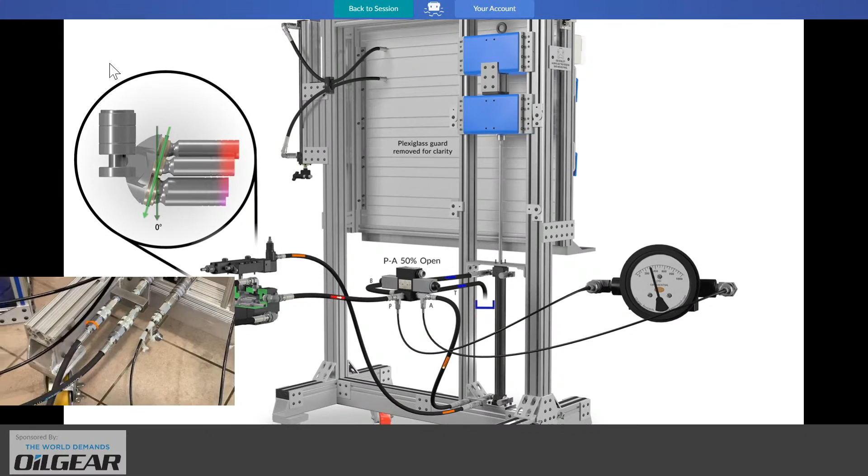This isn't a very dynamic environment. We're not digging in the earth where things continue to change. Things are very constantly set. Also, on the bottom right-hand port of our cylinder here, our gauge on the left of this panel, this digital gauge, is just going to show us the pressure at the base of the cylinder as we pick up one brick after another. So maybe I'll get Mark to start it up now.

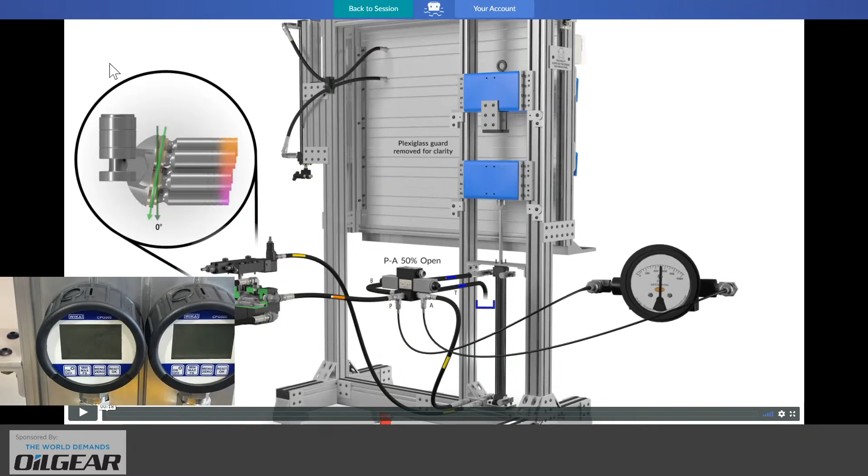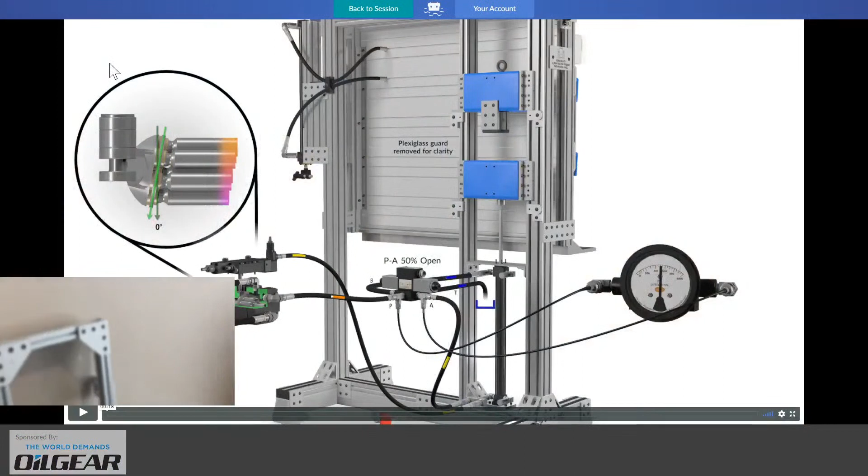I just want to say something before we start. In this particular video, this whole operation is generally, as the 3D video shows, in the back of this panel. We brought this out here just to be able to show you. We've taken the cover off because we had to do some things in time. Normally this is completely enclosed. You can't put your fingers in or do anything to pinch.

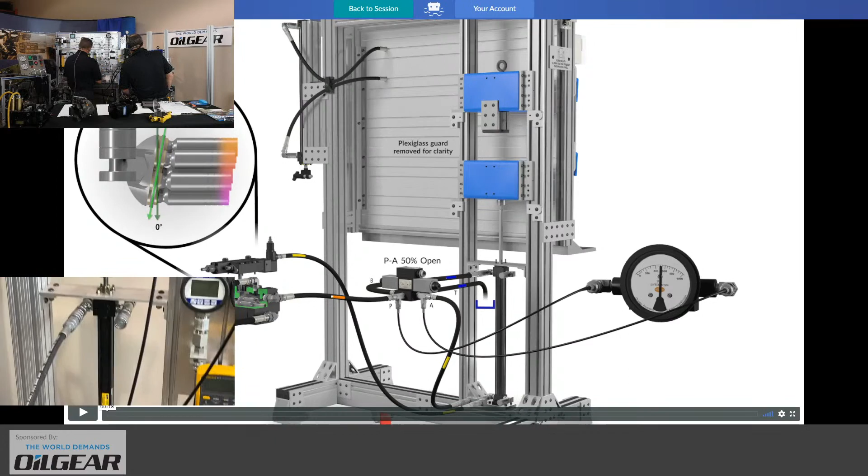We'll be careful to keep our hands out. Yes, you bet. We're gonna be moving slow. So Mark, as you put oil into the base of this cylinder using the proportional valve, P to A, and this is a 4-port 3-position valve with all ports closed. Oh yeah, there we center, go. There's your symbol.

We're sure to run that P to A. We're going to put flow into the base of the cylinder. For the first go around here, I'm just going to have you look at the overall pressure from the base of the cylinder in the left digital gauge here. That pressure is going to continue to increase as we lift one brick after the other.

Go ahead, Mark. Okay, keep in mind too, I haven't changed this pump. We already preset this earlier, so you know what this pump is set for. We'll get to the delta P right after that. Okay, let me just turn the lighting on the gauge here. It helps a little bit, causes some flickering too, but maybe we'll see it. Okay, go ahead, do it nice and slow. Stand back.

So just 40 psi. Contact the first brick, and we're now at 200 psi. Second brick, and now we are at about 350 or 400 psi.

Now, a question was asked earlier about what about the pressure at the end of the stroke? I don't want to answer the question yet, but notice over here, we're at a maximum pressure. Our compensator setting is at 1200, which is not typically where a load sense system would be set for, but it does have that capability. Now, when we run this back, we're going to bring it back the other way.